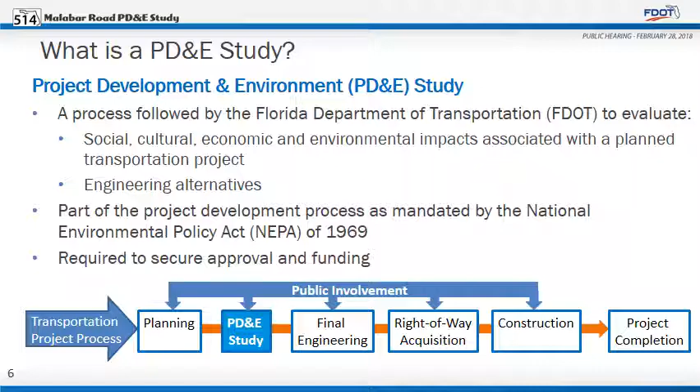This PD&E study is the second step in the project development process that FDOT follows to evaluate social, cultural, economic, and environmental impacts associated with a planned transportation improvement project. This is done in compliance with applicable state and federal regulations.

The purpose of this project is to accommodate increased travel demand, provide for multimodal, bicycle and pedestrian facilities, and improve safety along Malabar Road, State Road 514, from Babcock Street, State Road 507, to US 1, a distance of 3.64 miles.

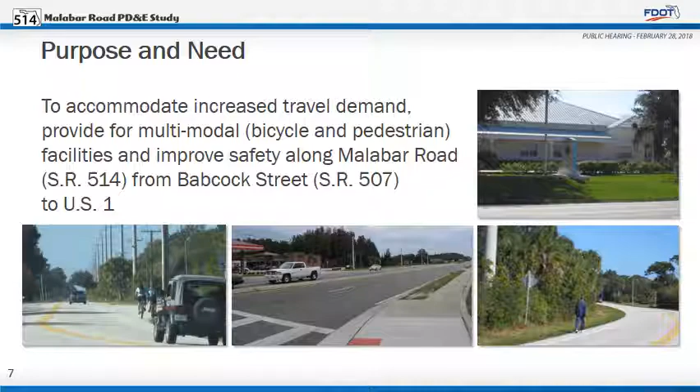The Malabar Road PD&E study begins at the end of the existing four-lane portion of Malabar Road to the east of Babcock Street. It continues east to the intersection at US 1.

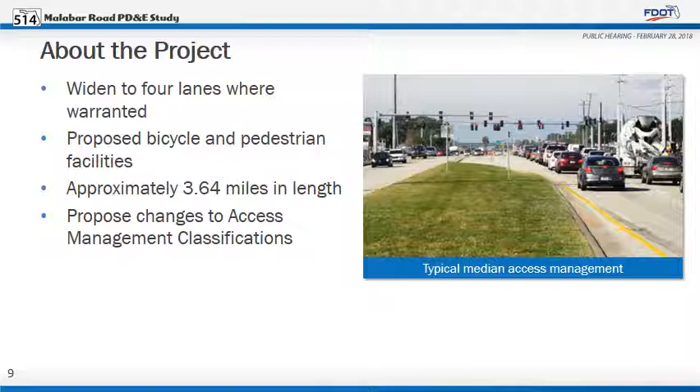The study included an assessment of widening Malabar Road to 4 lanes, 2 in each direction, where needed, due to current or future traffic volumes, and providing bicycle and pedestrian facilities for the entire length of the study. Malabar Road is currently classified as an urban minor arterial. This study proposes to change the access management classification to 5 from classification 3 in a portion of the study area. Both classifications are restrictive and provide different criteria for median openings.

The PD&E study identified several options to accommodate traffic volumes that are projected to occur in the year 2045, with a goal to maintain an acceptable level of service through year 2045.

Level of service, or LOS, measures to what extent cars are delayed when traveling through a given area. As in grade school, a level of service of F is failing, or highly congested, and A is the best, or free-flowing.

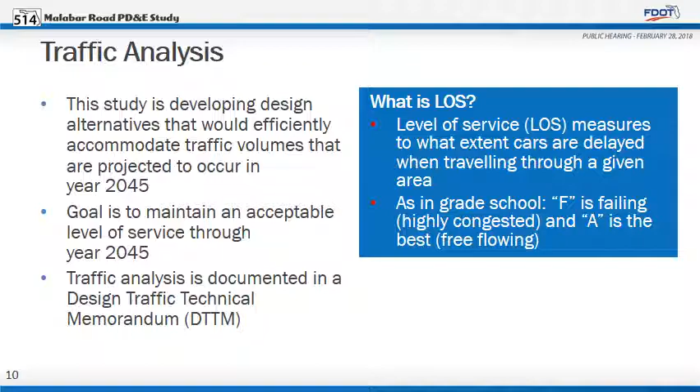A traffic technical memorandum included level of service calculations for existing traffic volumes, roadway conditions, or number of lanes and intersections, and for projected future traffic volumes in 2045 with no improvements and with improvements made.

Projected traffic volumes for the year 2045 indicate that, without improvements, the entire corridor will fail to meet the standard guideline of level of service D. With the improvements recommended by the Malabar Road PD&E study, the corridor will achieve a level of service that meets or is better than the standard guideline.

This table presents levels of service for the anticipated year the improvements will be finished, 2025, and the long-range forecast year, 2045, for the recommended build alternative.

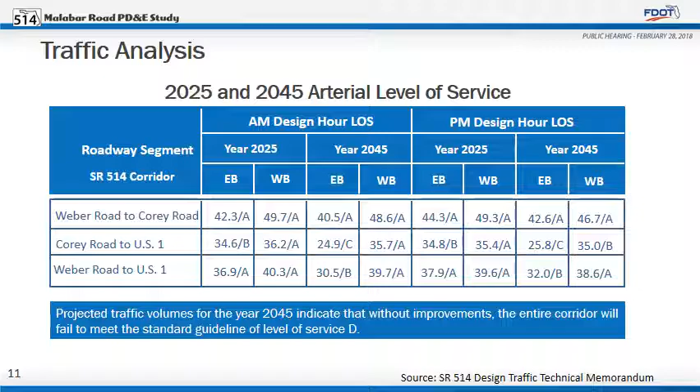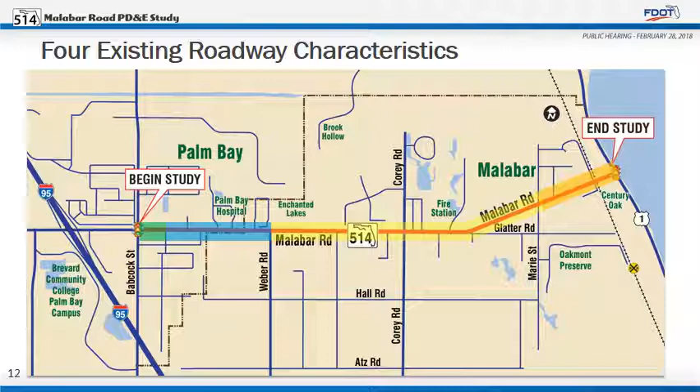The existing roadway exhibits different characteristics between Babcock Street and US 1. Four different segments are individually defined by the number of lanes, roadway features, widths, and other similar features. These are referred to as typical sections because they represent what is typically found within the segment. We use the term typical section to refer to both existing and new segments of the roadway's characteristics. The following slides describe each of the four segments: from Babcock Street to west of Enterprise Avenue, from west of Enterprise Avenue to Weber Road, from Weber Road to Marie Street, and from Marie Street to US 1.

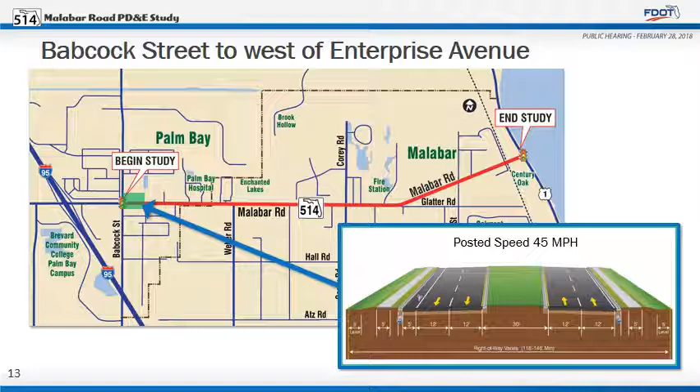The first typical section, from Babcock Street to west of Enterprise Avenue, includes two 12-foot travel lanes in each direction, with a 5-foot bicycle lane on the north side or westbound direction, and 5-foot sidewalks on both sides. The posted speed limit is 45 miles per hour. Drainage is collected by curb and gutter in an enclosed drainage system. The existing right-of-way varies from 118 feet to 146 feet.

The existing typical section from west of Enterprise Avenue to Weber Road includes one 12-foot travel lane and a 4-foot paved shoulder in each direction. There are no sidewalks or bicycle lanes. Stormwater runoff is collected in roadside ditches. The posted speed limit is 45 miles per hour. The existing right-of-way varies from 50 to 66 feet.

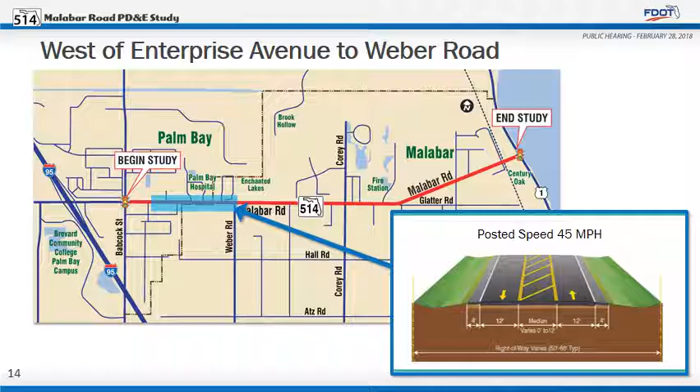The existing typical section from Weber Road to Marie Street includes one 12-foot travel lane and a 4-foot paved shoulder in each direction. There are no sidewalks or bicycle lanes. Stormwater runoff is collected in roadside ditches. The posted speed limit is 50 miles per hour. The existing right-of-way varies from 50 feet to 66 feet.

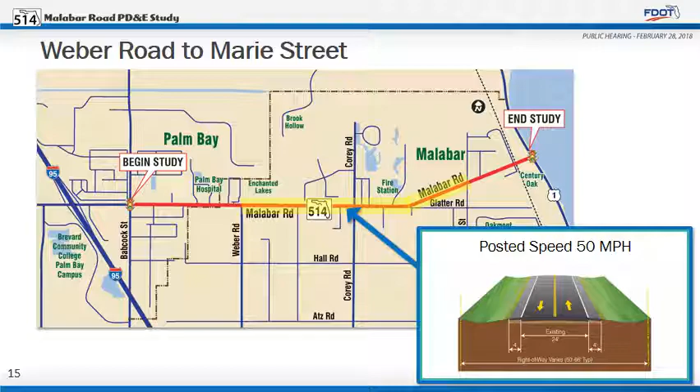Similar to the previous typical section, the fourth typical section from Marie Street to US 1 also consists of two 12-foot undivided travel lanes, but has varying 5-foot and 8-foot paved shoulders, gutter inlets on the south side of the road, and 30 mile per hour to 45 mile per hour posted speed limits.

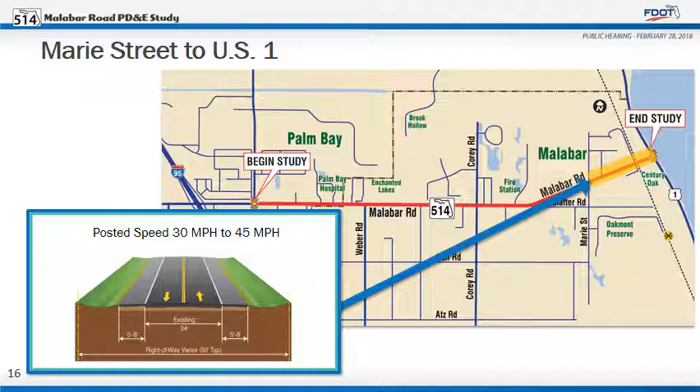A large segment of the study area is within the town of Malabar. The study team met with the town council, staff, committees, and local business owners over the course of the study.

A project website, www.sr514malabar.com, was developed to allow the public to communicate with the study team and provide comments. Draft study documents are available for review on this website.

Input from this meeting was factored into the decision-making process by the study team. Today's public hearing provides the public with another opportunity to comment on proposed improvements under consideration.

No-build, Transportation System Management and Operations (TSM&O), and build alternatives are being considered as part of this PD&E study. The no-build alternative maintains the existing facility as is. No improvements are made, and there is no congestion relief along the corridor. The corridor will remain two lanes without sidewalks and designated bicycle lanes on Malabar Road. The no-build alternative is also evaluated as a baseline for comparison with the build alternative.

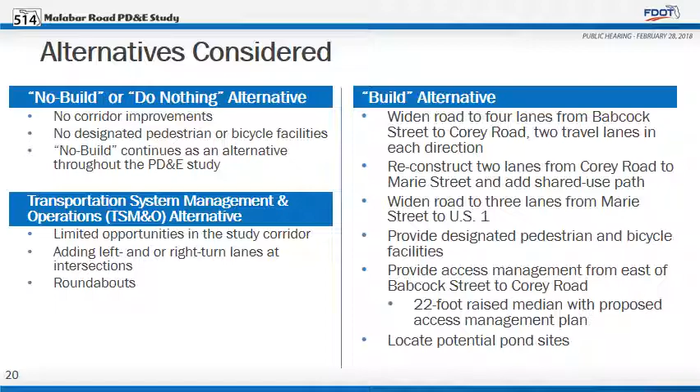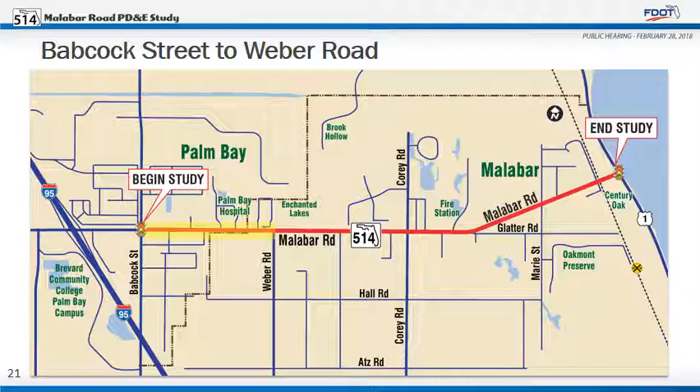First, we will discuss the recommended build alternative for the segment from Babcock Street to Weber Road. Beginning east of Babcock Street, the recommended build alternative includes a 4-lane urban typical section, providing 2 11-foot travel lanes and a 7-foot bicycle lane and 5-foot sidewalk in each travel direction. The posted speed is 45 miles per hour. Travel lanes are separated by a 22-foot wide raised grass median, and drainage is provided by curb and gutter on both the inside and outside lanes. The minimum right-of-way width required to accommodate this typical section is 128 feet.

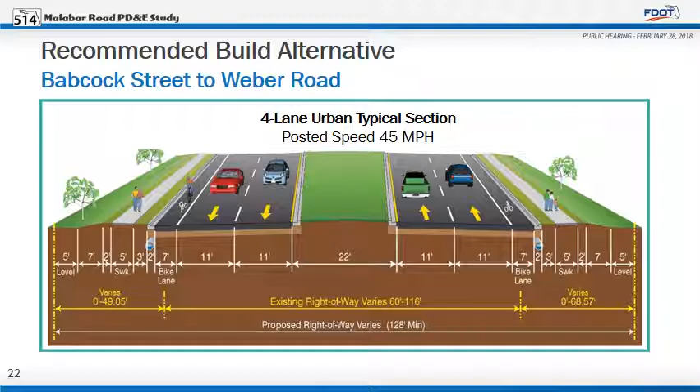The westbound bicycle lane is continued from Babcock Street to Enterprise Avenue, where the new 4-lane construction will begin. The alignment is a best fit approach, starting to the north of the existing alignment and then transitioning south just west of a roundabout at Weber Road. Impacted properties in this section include business and residential along the north side of the existing Malabar Road alignment.

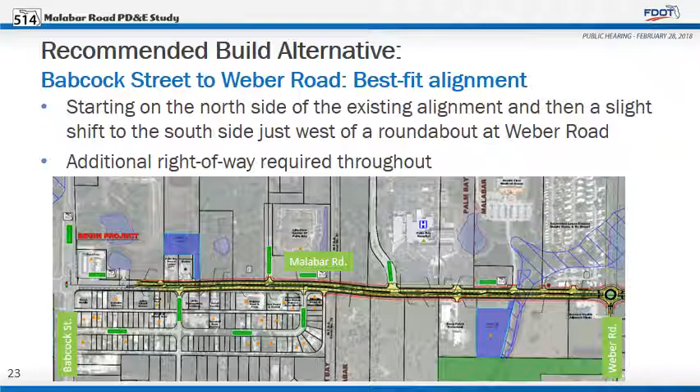The next segment is from Weber Road to Corey Road. Just west of Weber Road, the recommended build alternative transitions from a 4-lane urban typical section to a 4-lane suburban typical section. The 4-lane suburban typical provides 2 12-foot travel lanes, a 7-foot paved shoulder, and a 5-foot sidewalk in each direction. The posted speed is 50 miles per hour.

Travel lanes are separated by a raised median that includes 22 feet of grassed area and 4-foot inside paved shoulders. Drainage swales, ditches, are located on both sides for drainage.

Roundabouts are proposed at the Malabar Road intersections with Weber Road and Corey Road. We have roundabout brochures and a video on display at tonight's meeting explaining what roundabouts are and the safety benefit of using roundabouts.

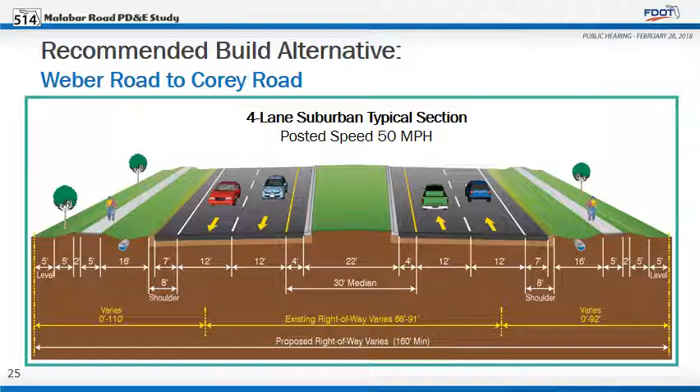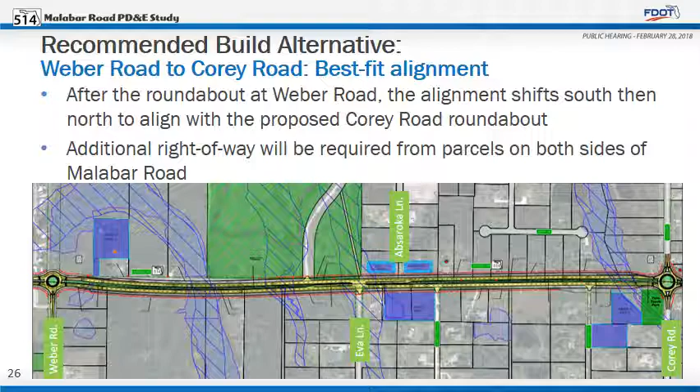The alignment is a best fit concept. From west to east, after the roundabout at Weber Road, the alignment shifts south, then north, to align with the proposed Corey Road roundabout. Approximately 0.43 acres from the Malabar Scrub Sanctuary and 0.05 acres from Fern Creek Crossing Park will be required. Impacted properties in this section include residential along the north and south sides of the existing Malabar Road alignment.

Roundabouts are included in the recommended build alternative at the Malabar Road intersections with Weber Road and Corey Road. Whenever FDOT reviews a new or existing intersection, it is standard process to review options, including a roundabout. Roundabouts have been shown to reduce fatalities by 90%, and injury crashes by 76%.

Roundabouts reduce the number of traditional vehicle conflict points from 32 associated with a conventional intersection to 8 in a roundabout. A roundabout also limits the number of vehicle to pedestrian conflict points to only 2 per roadway approach. Roundabouts support the local goal of speed control through the corridor, are used in both urban and rural situations in Florida, and accommodate large trucks and trailers.

The next segment is from Corey Road to Marie Street. East of the Corey Road intersection, the recommended build alternative transitions from the 4-lane suburban typical section into a 2-lane rural roadway, including one 12-foot wide travel lane and an 8-foot paved and grass shoulder in each direction, with a 10-foot shared-use path along the north side of Malabar Road. The posted speed is 50 miles per hour.

Drainage is provided by swales on both sides of the roadway. The 10-foot shared-use path provides pedestrian and bicycle facilities and connects the trailhead at Marie Street to the Malabar Community Park, the Malabar Scrub Sanctuary, and the Disc Golf Course Park. In addition, the 7-foot paved portion of the shoulder on both sides can be used as a bicycle lane.

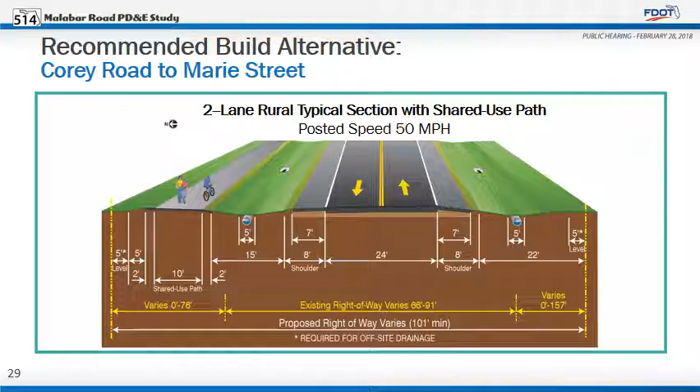The alignment is a best fit concept. The section alignment can be reviewed in 2 segments, described as follows. Between Corey Road and Shiflett Lane, parcels on both sides, with the exception of the U.S. Post Office located on the north side, are impacted as the alignment transitions from a 4-lane roadway to a 2-lane roadway.

Between Shiflett Lane and Marie Street, the alignment has impacts to both the Malabar Scrub Sanctuary and Malabar Disc Golf Park. The alignment shifts south of the existing roadway on the east side of the Malabar Disc Golf Park. Additional impacted properties in this section include residential along the south side of the existing Malabar Road alignment.

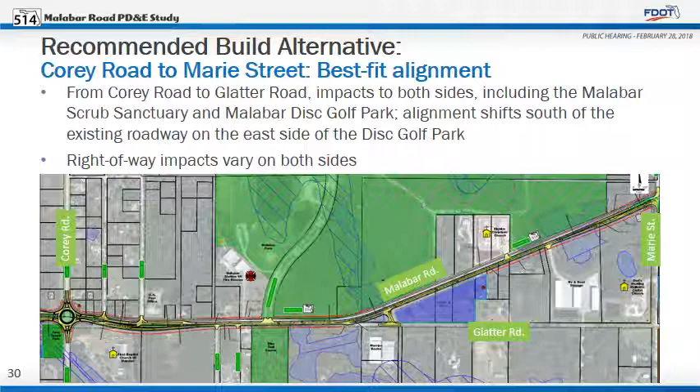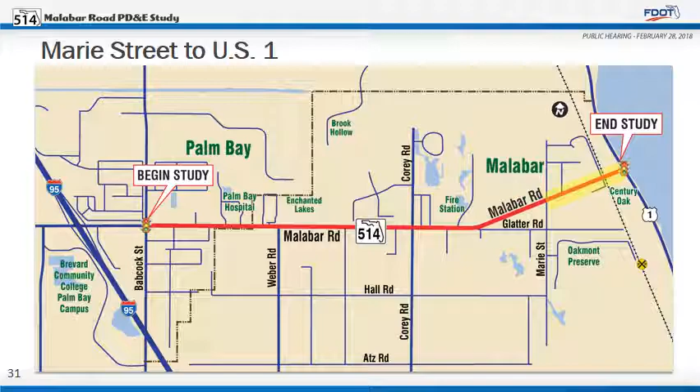East of Marie Street, the typical section transitions into a 3-lane urban typical section. The recommended typical section includes one 11-foot travel lane in each direction, a 12-foot bidirectional turn lane, and a 7-foot paved shoulder and a 5-foot sidewalk in each direction. Drainage is handled by curb and gutter. The posted speed is 35 miles per hour.

East of Marie Street, the typical section transitions into a 3-lane urban typical section. The recommended typical section includes one 11-foot travel lane in each direction, a 12-foot bidirectional turn lane, and a 7-foot paved shoulder and a 5-foot sidewalk in each direction. Drainage is handled by curb and gutter. The posted speed is 35 miles per hour.

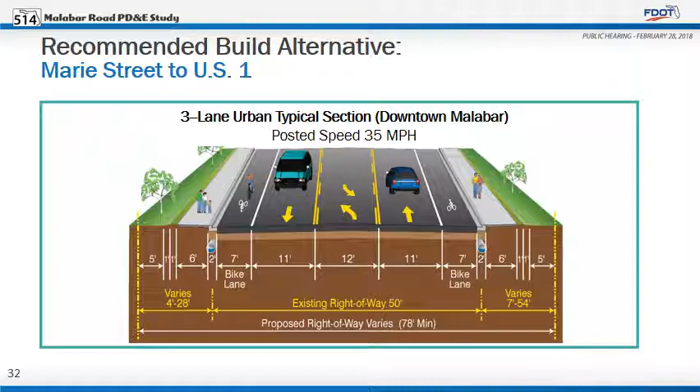A best fit alignment is centered on the existing roadway location. Turn lanes will be added at the intersection of US 1, as warranted by the traffic forecasts, to provide 2 eastbound left turn lanes from Malabar Road to northbound US 1, and 2 northbound left turn lanes from US 1 to westbound Malabar Road.

Impacts to properties include residential and businesses on the north and south sides of the existing Malabar Road alignment in this section.

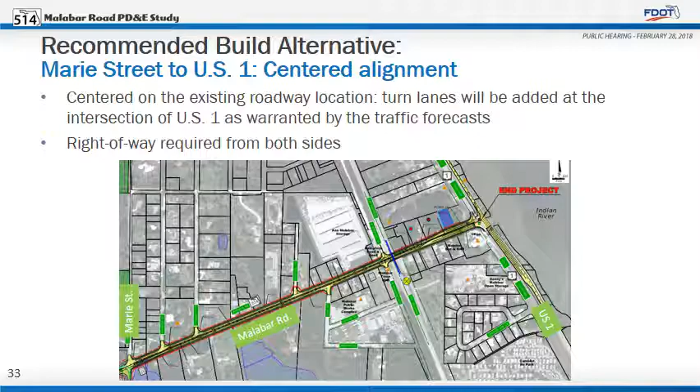The existing drainage systems will be enhanced to accommodate stormwater runoff from the proposed roadway improvements. The analysis included defining drainage basins and computing new and existing pavement areas. Stormwater design was performed to determine stormwater management treatment and attenuation volume requirements to meet current St. Johns River Water Management District and Florida Department of Environmental Protection design and permit criteria. The study identified potential pond site locations, assessed environmental and social impacts for each pond site option, and provided recommendations to satisfy current stormwater management criteria.

Pond siting evaluation criteria were developed to screen various potential pond sites. Each of the criteria is evaluated for impacts, which are then used for comparison to identify overall suitability and select recommended pond sites. 8 pond sites, shown in orange, represent the recommended pond locations for this study. The green areas designate conservation lands, and the blue areas are Federal Emergency Management Agency base floodplain areas.

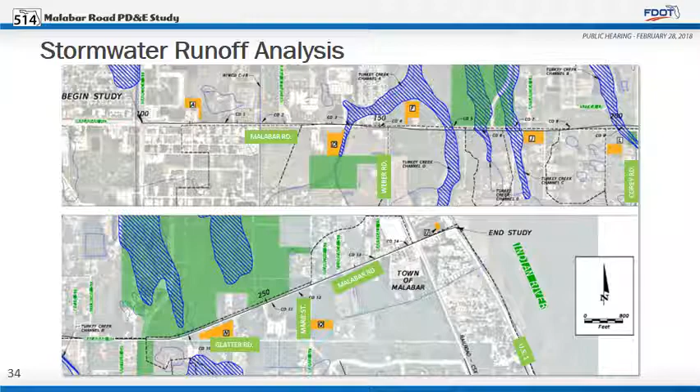Intersection geometry was analyzed in the Traffic Technical Memorandum for the major intersections in the study area. The intersection at Medplex Parkway is not signalized. An eastbound through lane and a westbound through lane are proposed.

At the intersection of Weber Road, a roundabout is proposed with 2 through lanes in both the eastbound and westbound directions. At the intersection of Corey Road, a roundabout is proposed with 1 through lane in both the eastbound and westbound directions. The intersection of Marie Street is not signalized.

Left turn lanes are proposed in the eastbound and westbound directions. At the intersection of US 1, an additional left turn lane is proposed for eastbound Malabar to northbound US 1, and an additional left turn lane is proposed for northbound US 1 to westbound Malabar.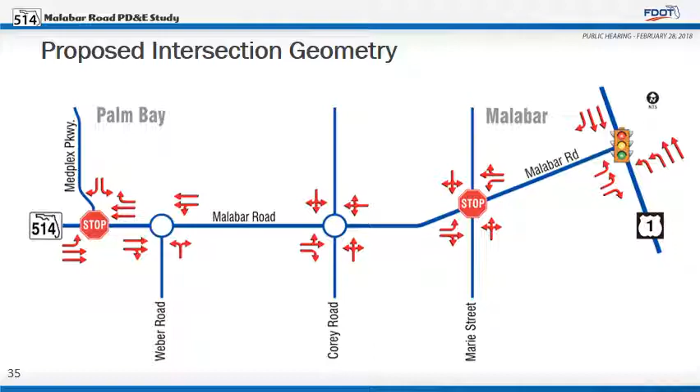To comply with various executive orders and other federal and state requirements, engineering and environmental information was reviewed and evaluated to determine if there were any substantial impacts to social and economic, cultural, physical, and natural resources that may result from construction of the proposed improvements.

The project will improve mobility and relieve congestion in the study area, providing positive social and economic impacts.

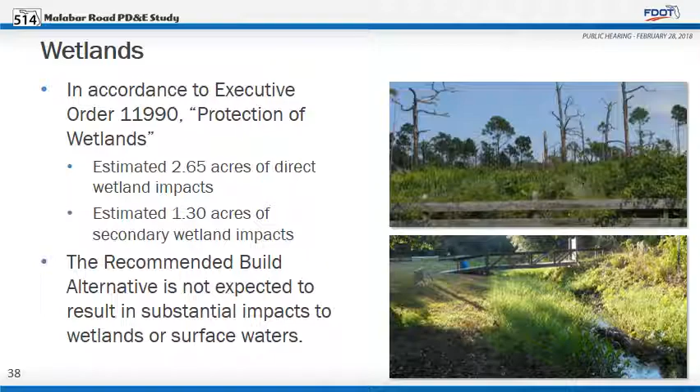Wetlands are addressed in accordance with Executive Order 11990. The estimated wetlands impacts include 2.65 acres of direct impact and 1.30 acres of secondary impacts. The recommended build alternative is not expected to result in substantial impacts to wetlands or surface waters.

A Phase 1 Cultural and Historic Resources Survey was conducted in compliance with Section 106 of the National Historic Preservation Act of 1966, the National Environmental Policy Act of 1969, and Chapter 267 Florida statutes.

An archaeological survey was performed within the existing and proposed right-of-way. The survey included the excavation of 88 shovel tests. The survey identified intact archaeological deposits associated with the previously recorded Malabar Site 8BR00053, and a single archaeological occurrence was identified within Fern Creek Park.

No potential adverse effects to any historical resources are anticipated.

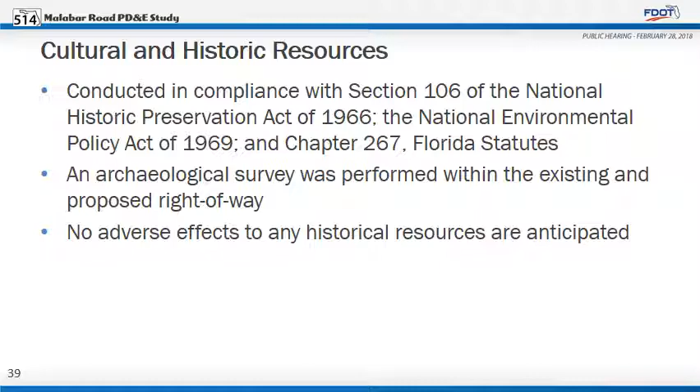An architectural survey resulted in the identification and evaluation of 1 previously recorded structure and 45 newly recorded historic structures, including 1 resource group and 44 structures. FEC Railroad, and the old Malabar Elementary School are recommended eligible for the National Register of Historic Places. No potential adverse effects to any cultural resources are anticipated.

Numerous recreational areas exist along the study corridor. The study team has coordinated with the owners of each facility to minimize any encroachment that might be detrimental to use of the facilities or their ongoing viability.

Coordination with the Florida Department of Environmental Protection, Division of State Lands and Acquisition and Restoration Council will be conducted during the design phase.

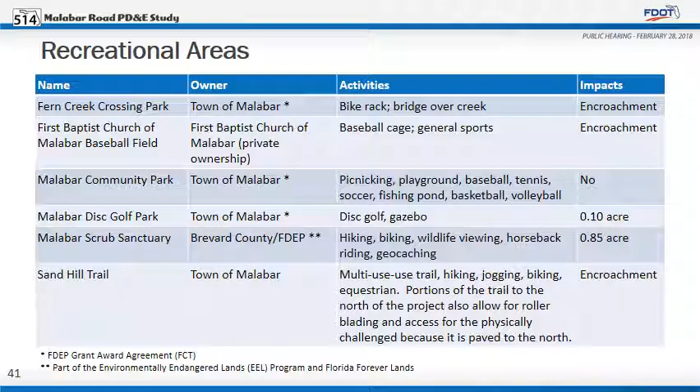Potentially contaminated sites in the vicinity of the project corridor were identified and evaluated to determine if impacts would occur as a result of the proposed improvements. 43 potential contamination sites have been identified: 32 are low-risk potential, 8 medium-risk potential, and 3 high-risk potential.

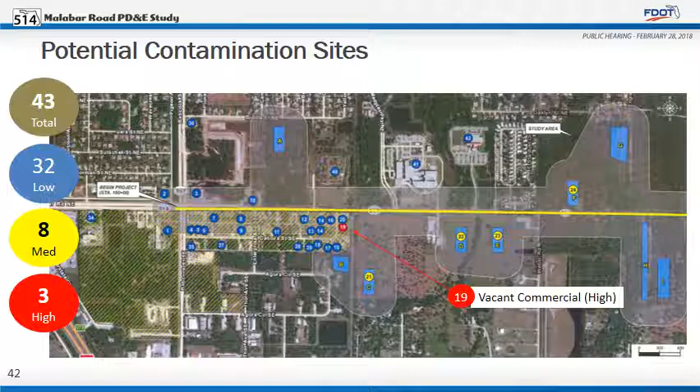This slide depicts one of the 3 high-risk potential sites. This slide depicts the other 2 of the 3 high-risk potential sites. No potential adverse effects to any contaminated sites are anticipated.

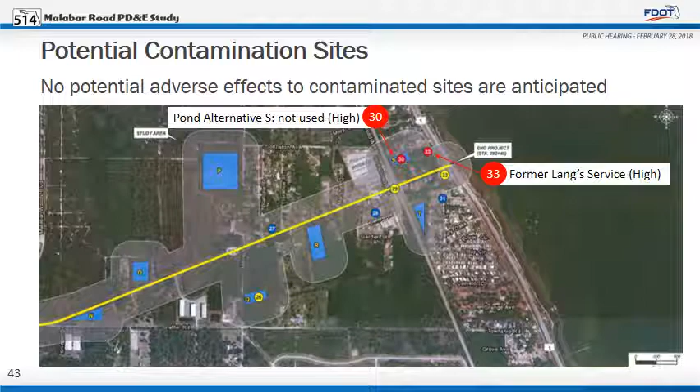The project was evaluated for impacts to wildlife and habitat resources, including protected species, in accordance with Title 50, Code of Federal Regulations Part 402 of the Endangered Species Act of 1973, as amended. The recommended build alternative is not expected to result in substantial impacts to protected species or their habitats.

To avoid and/or minimize impacts to wildlife, FDOT will continue to coordinate with the U.S. Fish and Wildlife Service and the Florida Fish and Wildlife Conservation Commission. FDOT will also continue to coordinate with the Brevard County Environmentally Endangered Land staff and conduct monitor and assessment for specific species during design and construction phases.

An air quality analysis was performed for the study using methodology established in the FDOT Project Development and Environment Manual. The analysis focused specifically on carbon monoxide concentrations, predicted using FDOT's screening model CO Florida 2012. Air quality impacts are not expected to occur as a result of this project.

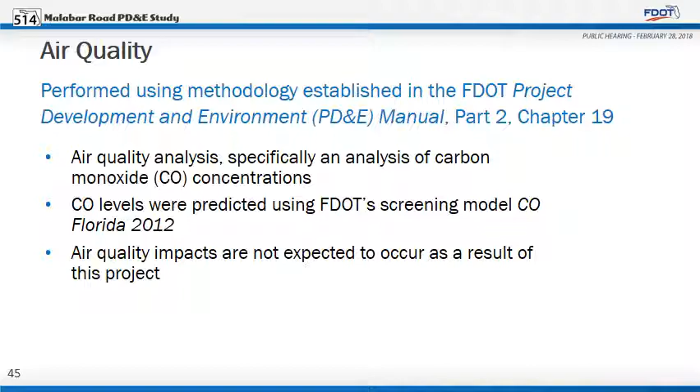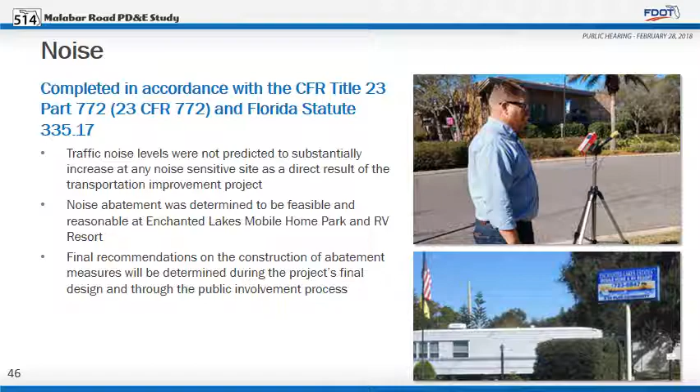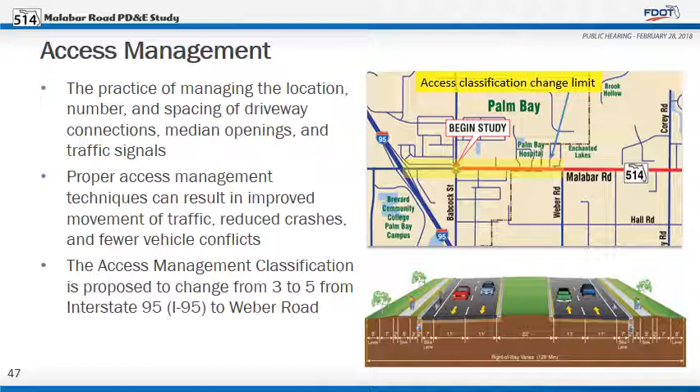The recommended typical sections from Enterprise Avenue to Corey Road includes raised medians along Malabar Road. This will support a change in the existing access management classification from I-95 to Weber Road, from Class 3 to Class 5.

Malabar Road is currently Access Management Classification 3. The Access Management Classification would change between I-95 and Weber Road to Access Classification 5.

The recommended build alternative includes a 22-foot raised grass median from Enterprise Avenue to Corey Road. With a raised median, full and restrictive median openings are recommended at different locations along the corridor.

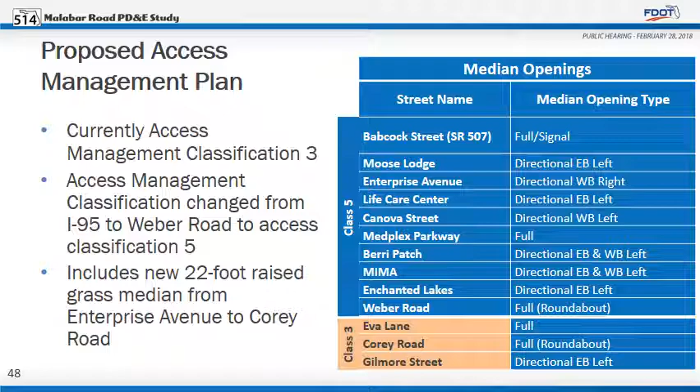All proposed median openings are displayed on the aerials available here tonight. This table shows the proposed median openings.

Right-of-way acquisition is anticipated for the recommended build alternative for roadway and drainage improvements. Approximately 25.73 acres of additional right-of-way is anticipated for roadway improvements, and approximately 19.26 acres of right-of-way is anticipated for off-site ponds. In addition, there is the potential for 8 residential relocations and 3 business relocations.

These anticipated relocations are displayed on the aerial photos available at tonight's hearing. All right-of-way acquisition will be conducted in accordance with the Federal Uniform Relocation Assistance and Real Property Acquisition Policies Act of 1970 and FDOT's Real Estate Acquisition Process.

If you are required to make any type of move as a result of an FDOT project, you can expect to be treated in a fair and helpful manner and in compliance with the Uniform Relocation Assistance Act.

If a move is required, you will be contacted by an appraiser who will inspect your property. We encourage you to be present during the inspection and provide information about the value of your property.

You may also be eligible for relocation advisory services and payment benefits. If you are being moved and you are unsatisfied with the department's determination of your eligibility for payment or the amount of that payment, you may appeal that determination. You will be promptly furnished necessary forms and notified of the procedures to be followed in making that appeal.

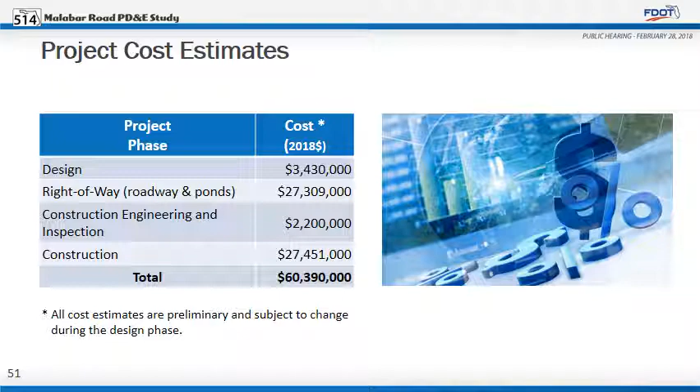The estimated total cost for the recommended build alternative based on 2018 values will be approximately $60.39 million. This includes $27.45 million for construction, wetland mitigation, and utility relocations, $27.3 million for right-of-way acquisition associated with roadway improvements and off-site ponds, and $5.63 million for final design plus construction engineering and inspection.

The Space Coast Transportation Planning Organization works with FDOT and local governments to fund and implement projects identified through various plans developed by the TPO. Improvements to Malabar Road in the study area are included in the Space Coast TPO's 2018 through 2022 Transportation Improvement Program. Improvements to Malabar Road in the study area are consistent with both the needs plan and cost feasible plan of the Space Coast TPO's 2040 Long-Range Transportation Plan.

The project is also listed in the Florida State Transportation Improvement Program. Over the next several months, FDOT will continue to finalize the analysis and will seek to approve the documents and improvements presented at tonight's public hearing.

Design and final engineering are currently funded in the fiscal year 2022 budget. Right-of-way acquisition and construction are currently not funded for this project.

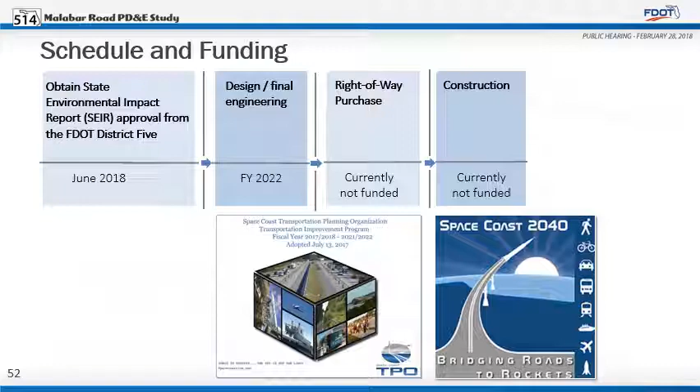Draft study documents were made available for review starting February 7, 2018, and will remain on display until March 13, 2018, at Franklin T. DeGroot Library in Palm Bay and the Malabar Town Hall. No final decisions will be made until after we review your comments.

You may provide your comments in several ways. You may provide an oral statement to the court reporter present here tonight. Complete a speaker card and make an oral statement at the microphone during the public comment period. Complete a comment form and drop it in the comment box provided here at the public hearing, or mail your comments to the FDOT project manager at the address shown on the comment form.

Postmarked by March 13, 2018. You may email your comments to FDOT at the address shown on the comment form or visit the project website and submit comments electronically. There is a dedicated page on the website for comments. Click on the Email Updates link, then fill out the form and click Submit.

All written material received at this public hearing and at FDOT's District 5 office, postmarked no later than March 13, 2018, or through the project website, will become a part of the public record for this hearing.